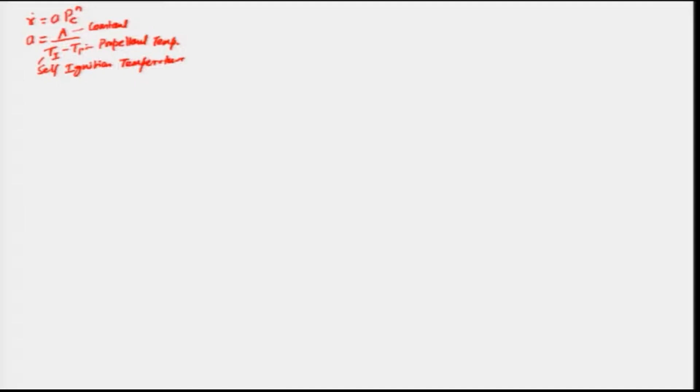Now, let us look at the effect of the propellant temperature on the burning rate or the regression rate. Consider an example where a is basically 176 divided by 415 minus T_p, for a particular composition of the propellant; 415 is nothing but your T_i, and 176 is basically the constant A. And if we vary T_p, the propellant temperature,

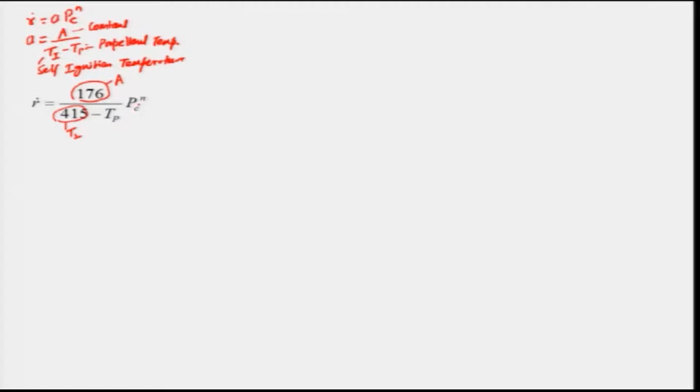and also vary the chamber pressure, we can get data, and we have plotted this variation of burning rate with chamber pressure for three propellant temperatures. This one corresponds to T_p equal to 240 K; you can see that the burning rate increases with the chamber pressure, and it increases in a nonlinear manner.

And of course, when the propellant temperature increases to T_P = 280 Kelvin, there is an increase in the burning rate, and the increase in burning rate is more predominant at high chamber pressure. This curve corresponds to T_P = 320 Kelvin, and of course there is an increase in burning rate with increase in propellant temperature for a particular chamber pressure.

If I consider this one, this is the increase, right, for a particular chamber pressure of 16 megapascal. This increase in burning rate due to the change in the propellant temperature for a particular chamber pressure becomes higher as we increase the chamber pressure.

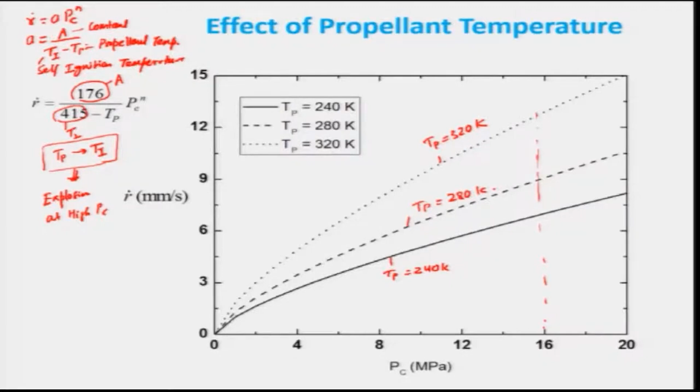So, therefore, one has to be very careful while designing a solid propellant by controlling its chamber pressure. We will be looking at how this burning rate is sensitive to the propellant temperature.

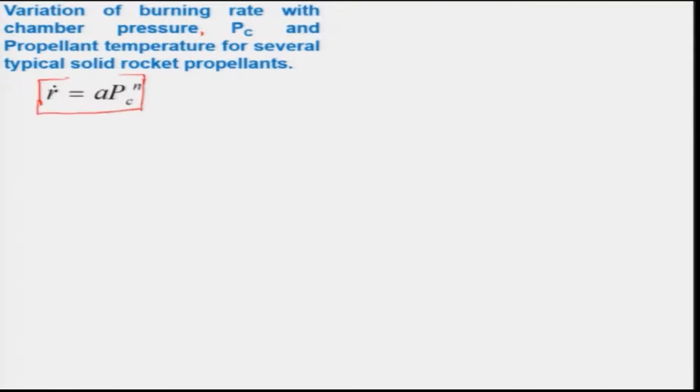Let us now look a little further at the variation of burning rate with chamber pressure and also propellant temperature, considering some typical solid propellants shown in this graph. Keep in mind that we will be using Saint Robert's law, which is plotted in this figure. The burning rate is given in inches per second, and the chamber pressure in psi, pounds per square inch.

You can see that it is plotted on a log scale. Let us consider the double base propellant. It is increasing with the chamber pressure, but beyond 400 psi it remains almost constant, indicating that the pressure index will be 0, and this we call plateau burning.

Now let us consider the composite ammonium nitrate propellant shown here. The burning rate increases with the chamber pressure at 40 degrees Fahrenheit, and this looks to be linear, a straight line, with a slope having certain finite values. As the temperature increases to 60 degrees, the slope remains almost similar, but the burning rate increases, and with further increase of propellant temperature to 140 degrees, there is similar behavior, but with increased burning rate.

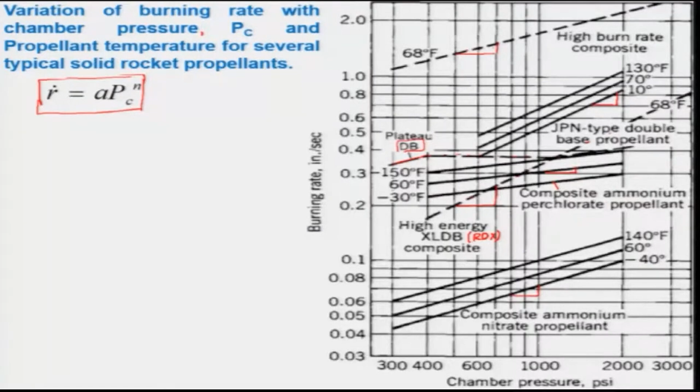So, let us summarize what we can learn from this discussion on burning rate variation with chamber pressure for a range of propellant temperatures. We have seen that the regression rate or burning rate increases with chamber pressure, and the burning rate increases with propellant temperature. The regression rate varies from 0.1 to 75 mm per second; this 2 inch means basically around 50 mm per second.

However, we will see in the next slide that people have achieved around 75 mm per second. However, the common burning rate range is around 6 to 13 mm per second. That means, if you look at this range, 13 will be around this, and maybe 6 is around this range.

And the pressure index n is lower for double base as compared to composite propellant. Keep in mind, it is not shown here. The JPN is a mixture of these propellants, but you can see this slope in the double base propellant has very low n values, and therefore it may be subjected to instability, or maybe it will extinguish at a certain low pressure. Addition of nitramine RDX to the propellant can enhance the burning rate and pressure index, as we have seen. The burning rate has been enhanced quite a bit, and so also the pressure index.

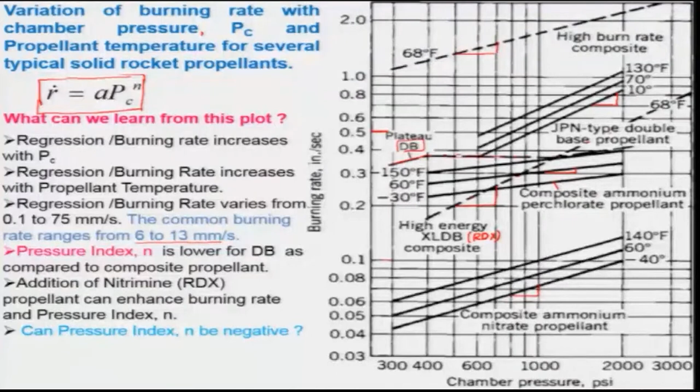The question arises whether we can have a propellant with negative pressure index. So, we will see that. We are using Saint Robert's law for this burning rate relationship with the chamber pressure. If you use that and plot ln r against ln Pc, this is corresponding to A Pc^n, and in this case n is positive, greater than 0, whereas when n is equal to 0, this is the plateau burning.

Plateau burning is really more sought after, because the burning rate is not changing with respect to the chamber pressure. In other words, the thrust will not be changing with respect to change in the chamber pressure. That is a very good thing, but this is also problematic to some extent, because it may lead to instability and may extinguish at a certain time, and most double base propellants will be experiencing this.

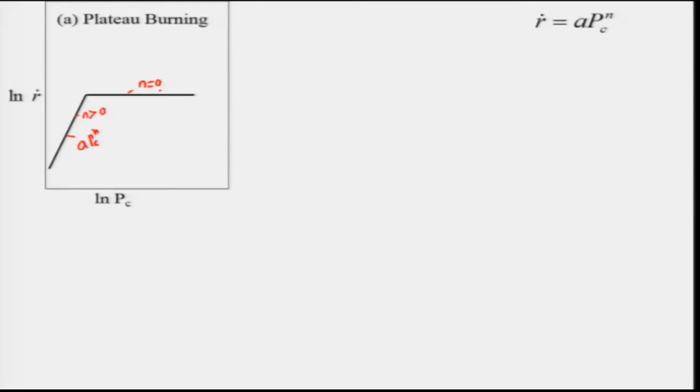The pressure index n can be modified by varying the rate of chemical reaction in the fizz zone, as we have seen in the case of double base propellant. There are several ways of doing that. You can add some chemicals so that the chemical reaction rate will not be varying on the burning surface. The heat release in the fizz zone will not be changed, due to the constant burning rate with respect to chamber pressure. This can be achieved by adding several chemicals.

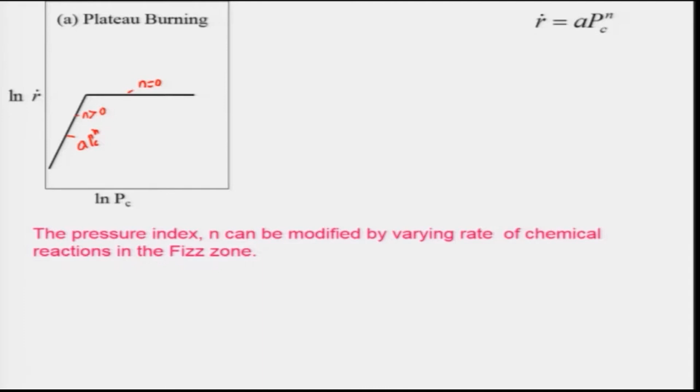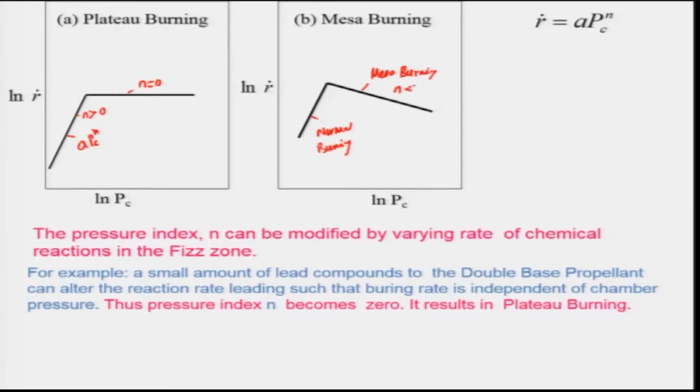For example, a small amount of lead compound added to the double base propellant can alter the reaction rate such that the burning rate is independent of chamber pressure, and the pressure index n becomes 0 or tends towards 0. This results in plateau burning, meaning n is equal to 0. And keep in mind that when n is negative, you can have mesa burning. This is normal burning, and here the slope is negative, so n is negative, and this is known as mesa burning, because n is less than 0.

A propellant which exhibits a negative value of index is known as mesa burning, which is useful for restartable rocket motors or gas generators. When the pressure is decreased and you operate at lower pressure, the burning rate is very high, so it will not lead to any instabilities or extinction of the combustion. Therefore it is very useful for that. Keep in mind that plateau burning and mesa burning are found mostly in double base propellants, but in some composite propellants you can also find plateau burning.

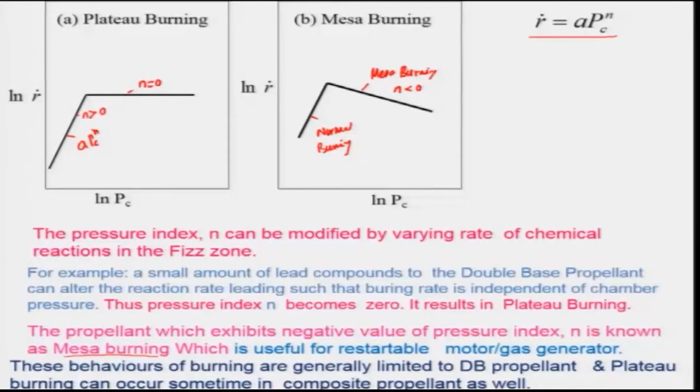Keep in mind that this semi-empirical relationship being used profusely was derived for internal ballistics of rocket motors, and the more natural and general form of the expression for the regression rate will be r dot = A Pc^n + b, where b and A are dependent on the propellant temperature and independent of the chamber pressure. It is not used very much, but it is more general.

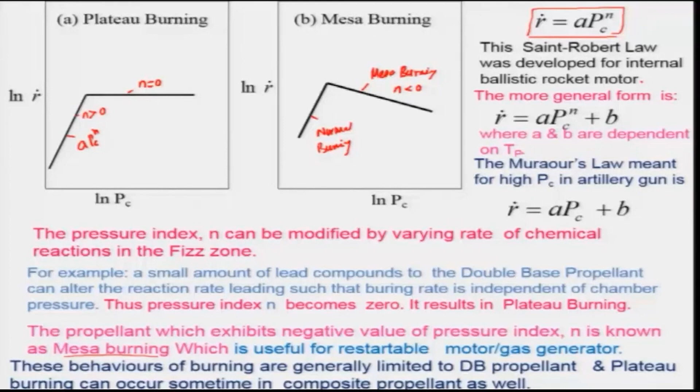Another one being used is known as Muraour's law, for high chamber pressure, developed particularly for artillery guns: r dot = A Pc + b. Keep in mind that n is equal to 1, so it becomes A Pc, meaning it goes linearly with the chamber pressure, because at very high pressure the changes are not much. So we have now seen these various kinds of burning, and in the next lecture we will look at more data on burning rate. Thank you very much.